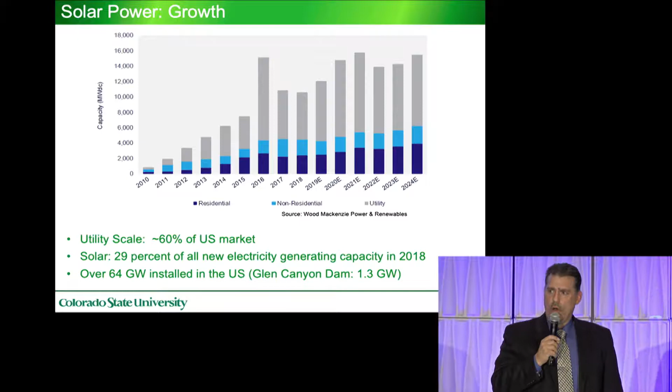60% of the U.S. solar industry is utility scale power. That's not the residential rooftop or commercial, these are the large fields that are deploying to utility assets. Solar was almost 30% of all new electrical capacity added last year.

The reason for this is significantly dropping costs. Since 2009, solar power costs have dropped almost 10x over the course of that time, and that's really fueling this significant growth.

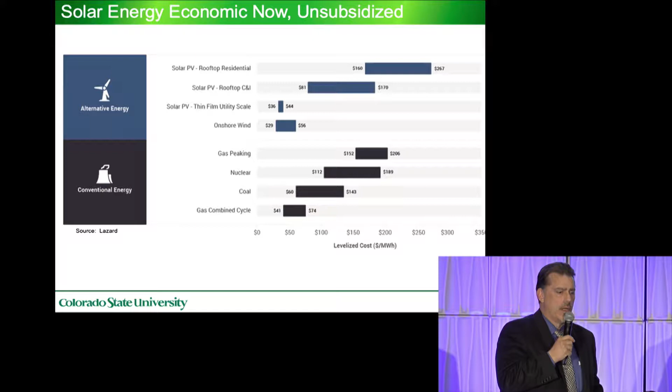So solar is economic right now, unsubsidized, and the Wall Street analyst firm Lazard is technology agnostic. They analyze different technologies, not just solar, and pull out the different subsidies associated with each technology and assign an energy cost, the so-called levelized cost of energy. You can see that thin film utility scale solar is the cheapest compared to any of the conventional resources.

I want to say this another way, something highlighted at this conference: for new generation, if coal, oil, natural gas, or nuclear are used, you're paying more money than solar or wind. And that's not accounting for the benefit associated with greenhouse gas mitigation or pollution prevention. This is just purely dollar per electron.

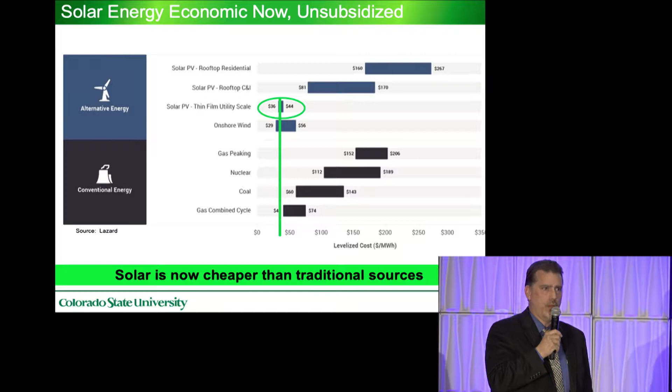So the question is, okay, solar's great, it's economic now, but the sun doesn't always shine. What happens when we have the peak demand, which doesn't fall well when the solar resource is maximum?

Well, we're starting to see with technology innovations in both solar and storage that solar plus storage is now economic. With coal at a median cost of energy of about $101 per megawatt hour, you can see that solar plus storage with different technologies are right in the game there.

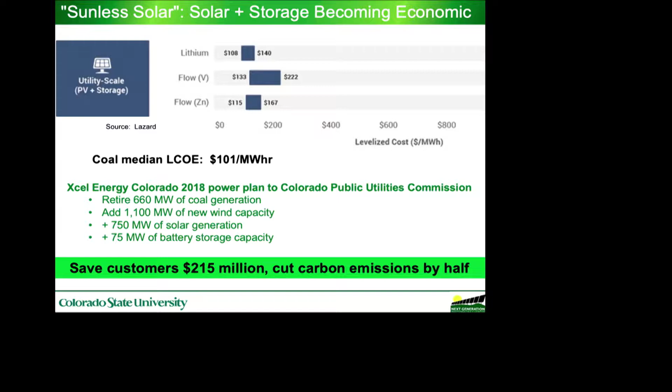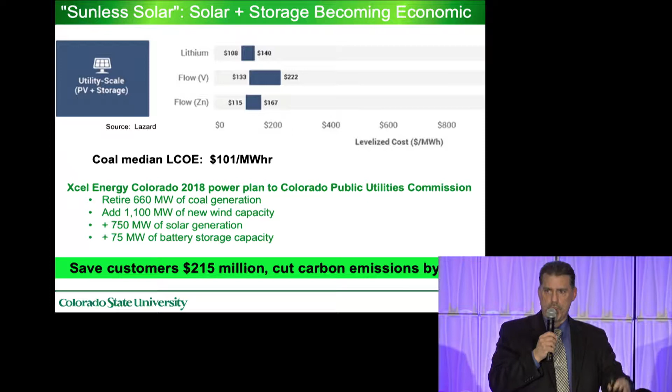An example of this, also brought up by Governor Ritter earlier this session, was that in 2018, Xcel put a power plan to the PUC in which they wanted to retire coal generation and add significant wind, solar, and storage. The outcome of that plan would be to save customers over $215 million and cut carbon emissions in half.

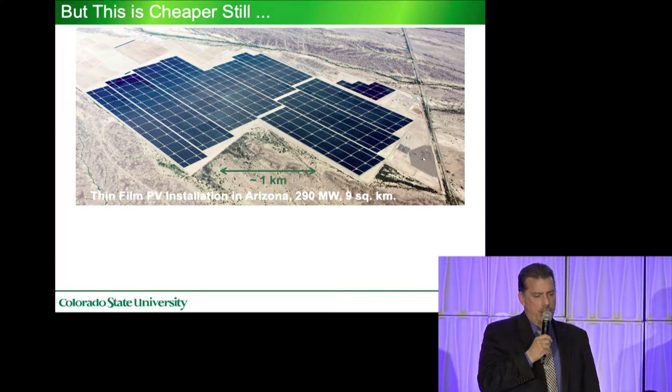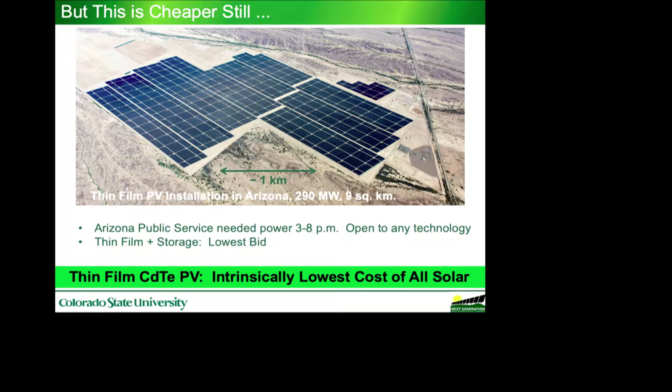So the next generation technology that I work on holds opportunity to be even cheaper still. This is an example of a cadmium telluride thin film plant deployed in Arizona. You get a sense of the scale there—the structures to the right are not cars, those are buildings. This is a giant facility, but this is not something out of the ordinary.

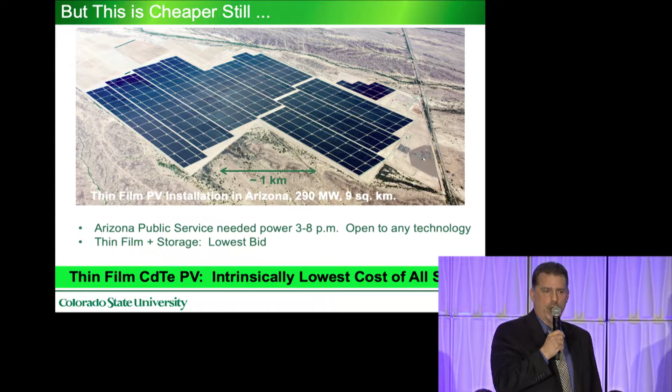As a case of how economic this is, Arizona Public Service asked for power generation between 3 and 8 p.m., open to any technology. The cheapest bid was solar plus storage using thin film cadmium telluride.

The center that I'm with, the Next Generation Photovoltaic Center, is at the forefront of this next generation technology in solar. We started in 1991 researching this technology, chosen based on the fundamentals. It wasn't something that was an outcome of a particular grant activity—it was a key effort that we chose to look forward to.

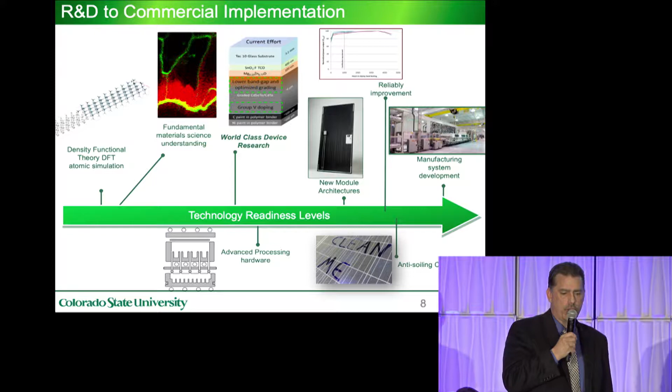Now our center is one of the leading ones in all solar and one of the leading technology development areas for thin film. We have multiple domestic and international university partners, and partner with the Department of Energy, the National Science Foundation, and Sandia. We do research across the technology readiness levels, from the most abstract basic R&D up to technology commercialization.

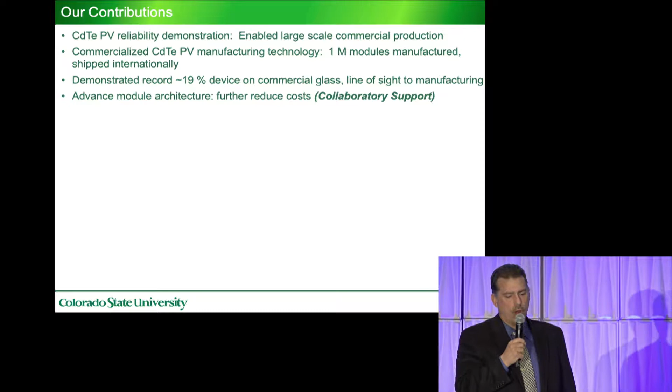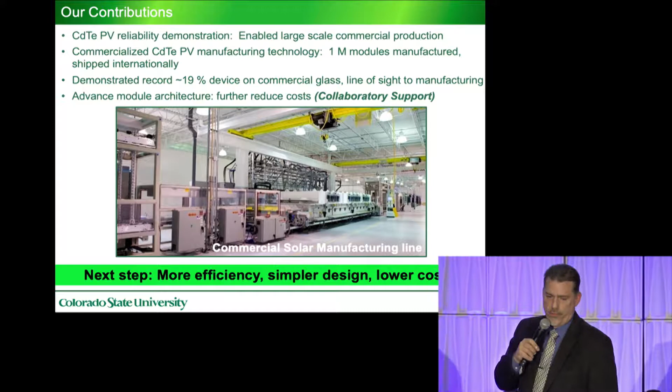Thank you, Brian. Our next step is to improve efficiency, go to a more simple module design, and lower costs. So I'll leave you with our center's mission: the power of the sun to make PV electricity a major source of energy. Thank you.

Our next speaker is Sybil Sharvelle from Colorado State University. She'll be talking about conversion of organic materials into fuels.

Oh, okay. All right, thank you very much. And I'm going to just go ahead and jump right in here.

I'll be talking about how we can treat waste materials, particularly organic waste materials, anaerobically to generate value-added products, including fuels. The most classic example of this kind of technology is anaerobic digestion, which has been around for decades in wastewater treatment facilities. With this kind of technology, we can take food waste, animal manure, human waste—any organic waste material—and use microorganisms to convert that organic material into methane.

In the last breakout session, there was some talk about food waste, and obviously the elephant in the room with food waste is generating less. In some municipalities, up to 40% of their total waste material is made up of food waste. So that's too much—we've got to reduce food waste, but as long as humans are around and eating food, we're going to have some food waste. As long as we're eating meat and animal products, we're going to have cows and pigs and things pooping, and we've also got human waste to deal with.

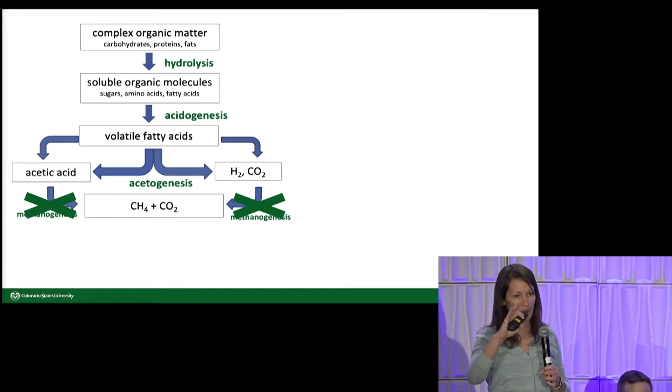One thing we can do is actually cut this process off before methane is generated, forming organic acids instead. We inhibit the methane generation and instead form these potentially higher value organic acids and carboxylic acids that can be used as fuels or to make plastics. Methane is not right now financially highly valuable, so this can be a way to modify this technology to make other more valuable products, and there's a lot of ongoing research there.

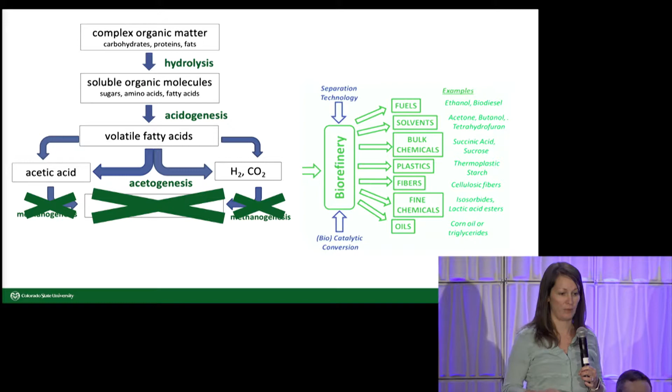A question comes up: is this really decarbonization? We're still using carbon and there's going to be emissions. If we go and take this methane and put it in an engine, we're going to make emissions, and we're maybe not necessarily reducing carbon.

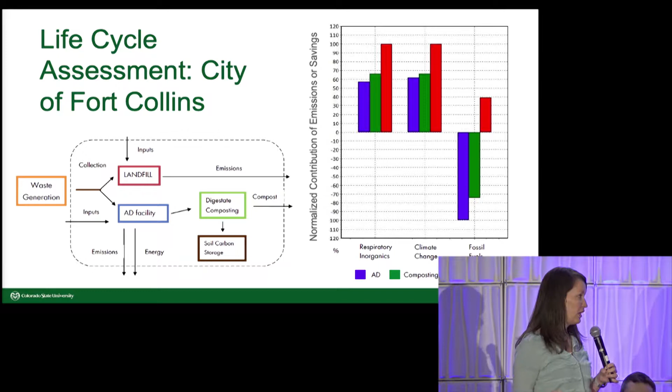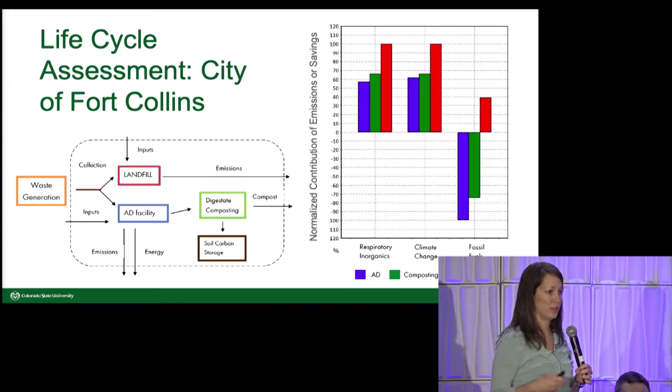In terms of fossil fuels, there's an actual sink of emissions, or use of fossil fuels, that results from anaerobic digestion and composting, even when we consider the emissions. A lot of that is because we're producing a fuel that's replacing fossil fuels. A large component is that the digestate can serve as soil carbon storage, reducing carbon, and it can also replace nitrogen. These food waste and other waste materials have a lot of nitrogen and phosphorus that can replace synthetic fertilizers, so there are fossil fuel benefits from that too. Even when we don't consider those benefits, anaerobic digestion still has a lower carbon footprint overall compared to landfilling.

So there are lots of ways we're working to make new technologies for anaerobic digestion or generation of other valuable carboxylic acids. My lab has generated a technology that's been licensed by Nexus Bioenergy. Traditionally, anaerobic digesters were in wastewater facilities where wastes are very wet, and we're working to address higher solid content manures, like what's generated on feedlots.

So this is the technology we've been working to develop. This is how this can... let me go back real quick, because it's important that we're also working on capturing fertilizer, capturing every potential resource.

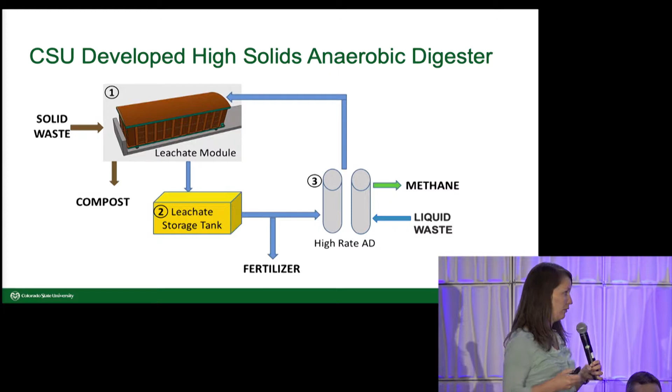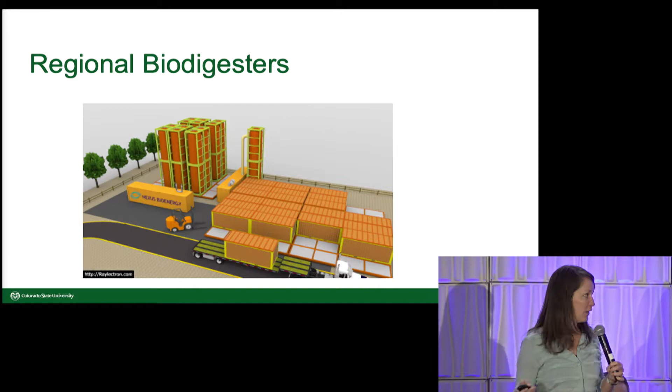I think the most important point moving forward is we've got to work to make these systems more efficient and capture every possible resource out of these waste materials, turning those into value-added products to make this work. That's where a lot of the innovation is happening right now, in how we can generate those useful products. This is a picture of a potential regional biodigester, collecting waste from different sources like municipalities and feedlots, any of the above. And with that, I'll go ahead and conclude.

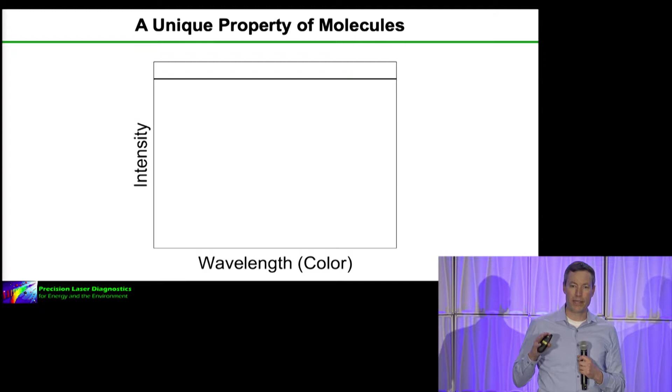Everything I'm going to talk about is based on a simple but unique property of molecules: every molecule absorbs light at very specific wavelengths, different colors. So if I take light of many colors and shine it through a region that might contain water vapor, I'll see at the other end that some of the light is missing at specific wavelengths, and which wavelengths is determined by the structure of that water molecule.

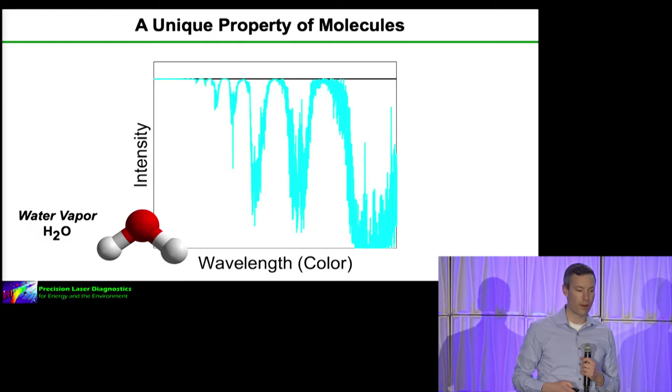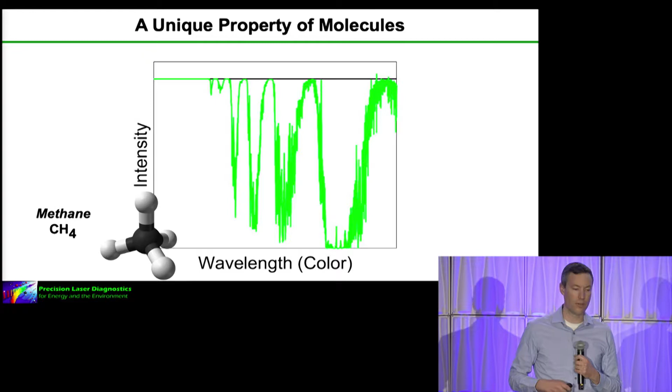If I change the structure to carbon dioxide, I get a different signature. If I do it again to methane, I get yet another signature. So the very same thing that makes most of these gases greenhouse gases that absorb, we can turn that around and turn it into sensors to look for these molecules and quantify them very, very carefully.

The sensor I'm going to talk about is based on a special kind of light source, a laser. We all know lasers, very coherent, I can shine them over long distances, over known beam paths. But there's one problem: most lasers are one pure color of light, so it's not so good if I'm trying to identify those special signatures of the different molecules.

Over about the last 15 years, physicists at the National Institute of Standards and Technology at CU have built a type of laser called a frequency comb that generates hundreds of thousands or even millions of colors of light from the same laser at the same time. This is powerful because we can start to use this to see those signatures of the different gases.

We've heard a lot about natural gas as a transition fuel in terms of reducing our carbon. It's also a really good load balancer because natural gas can enable rapidly tunable electricity generation technologies.

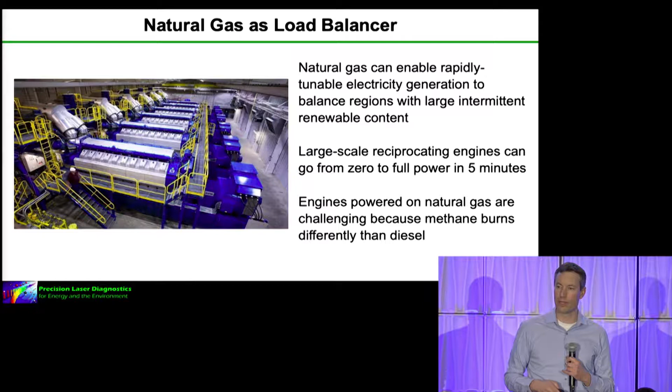Reciprocating engines, which are giant versions of what's in your car, can come to full load in 5 minutes, and so these are being installed to offset things like wind and solar that ramp very quickly. The issue is that we can't just drop natural gas into a diesel engine like we've been running for years. It doesn't burn quite as well, and it burns differently.

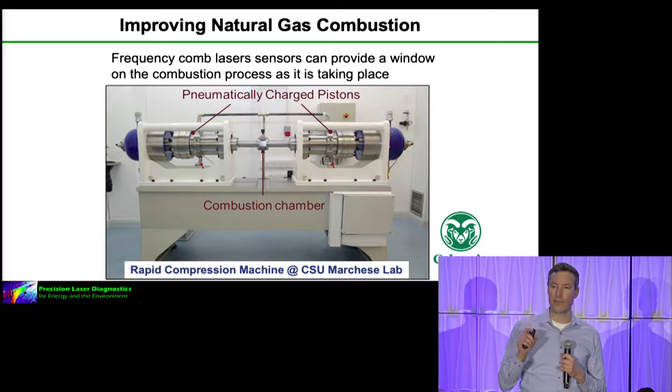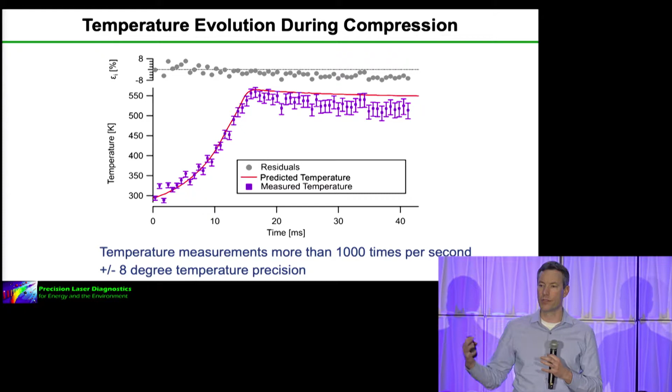So we've paired up with Anthony Marchese at Colorado State University, and we brought these frequency comb lasers up to his lab and tried to gain a window into the combustion process happening in natural gas engines as it's happening. These are some measurements of temperature during compression in a system much like a large-scale natural gas combustor, and we can measure temperature, methane, and the evolution of these species more than 1,000 times per second.

So we can take that same technology and move way up to the upstream end of things and look at the production of natural gas. We know that burning natural gas is nice as a transition fuel, but because it's a powerful greenhouse gas absorber, if we leak just a few percent of our methane along the way, it more or less offsets the benefits of burning it as a fuel.

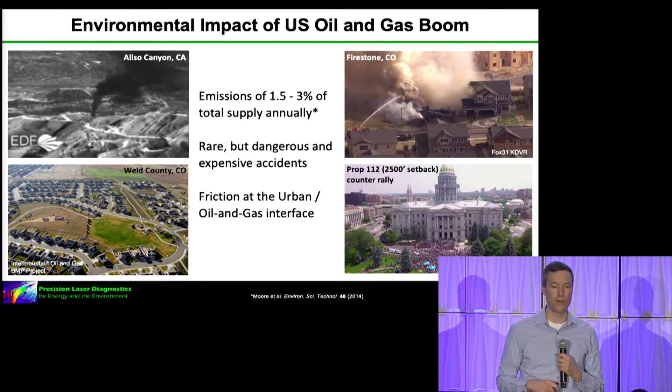Also, if we have rare but dangerous accidents, that has caused, as many Coloradans have seen, a lot of friction at that urban oil and gas interface. So the question we were asking ourselves is, could we take this same technology and send laser beams out over mile-long path lengths to look for leaks across vast swaths of the very dense oil and gas infrastructure that exists, for example, in eastern Colorado? And if we do that, can we bring the monitoring cost per site to really, really low levels?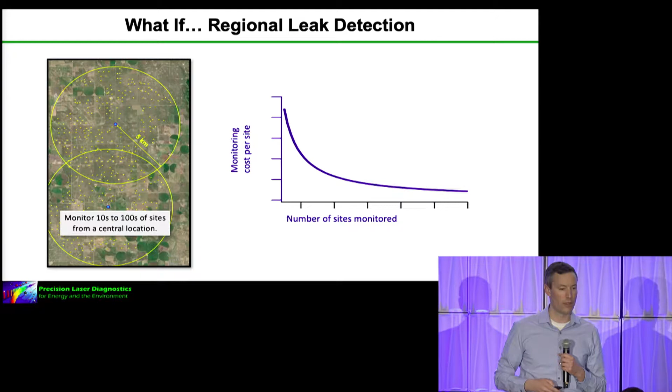And so we've done this. With funding from Brian and the ARPA-E program, we've put these systems in the back of trailers in eastern Colorado. We've sent the laser beams out over oil and gas fields. We've gone to the CSU METEC test site and shown that we can detect, from a kilometer away, methane leaks as small as 1/8 of your breathing rate right now. We can attribute it to the right pad, and we can size it to within 20%.

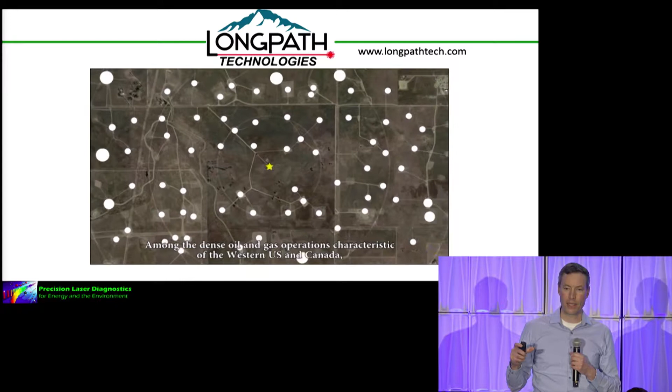The team got very excited about this, and we've spun out a company now called Longpath Technologies that's working with 4 industrial partners to roll this technology out into the field and figure out how to integrate it with oil and gas business practices.

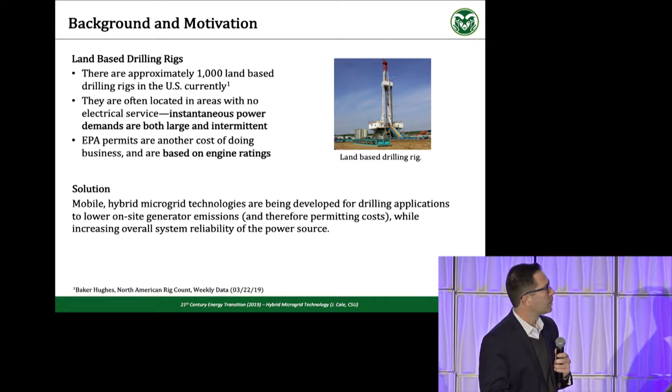So the technical approach here is the typical generator system in a hybrid combination with energy storage and power electronics.

The idea is that as the load increases, you get these large swells, and you can provide power almost instantaneously using the batteries. That idea itself is not new, but the technical advances are around the instantaneous tuning and control based on changes in load dynamics.

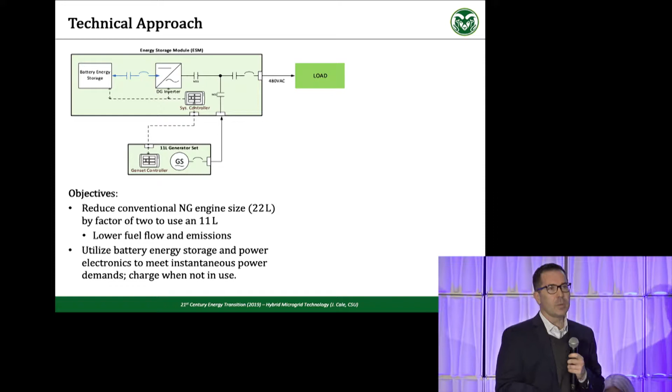The other thing with this technology is that if the generator system goes out, let's say there's a discontinuity in fuel flow from the wellhead, then this acts essentially as a UPS, so you can ride through those cases with the battery storage system.

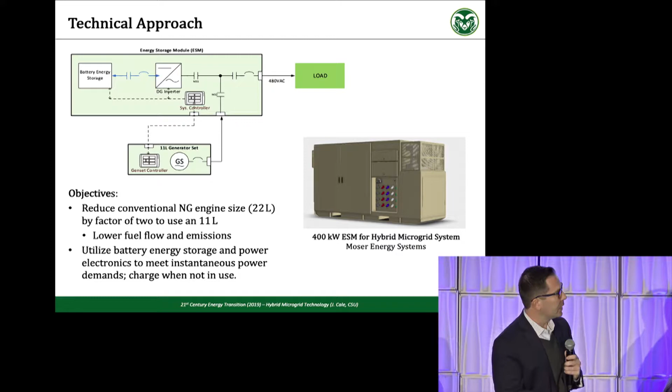The example I'll show, a real system, is the reduction of a 22-liter natural gas generator down to an 11-liter generator. This is our prototype system, 400 kW, being developed by Moser Energy Systems. You may have heard of them if you're in the oil and gas industry.

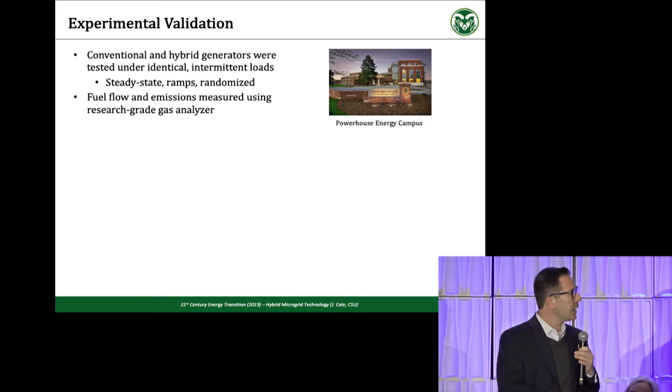Right now, as we speak, we're doing experimental validation at the CSU Powerhouse Lab, about an hour north of us if you're interested in visiting. We have infrastructure there to do testing up to 400 kW with a programmable load bank, so we can do side-by-side measurements between the conventional and hybrid unit, with steady state and randomized loads, and research-grade gas analyzers for comparisons.

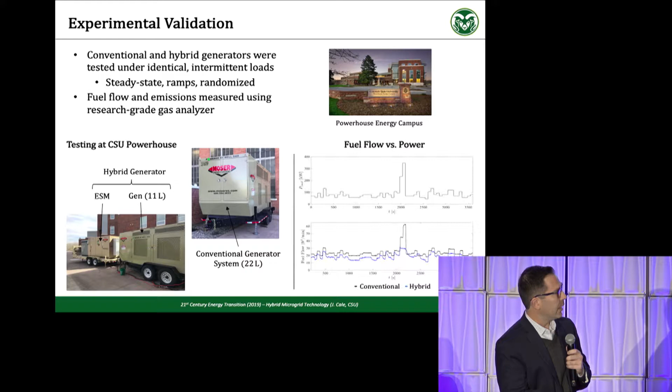The plot on top shows randomized load profiles based statistically on measurements we've obtained. You can see the spike in the middle where it goes up to about 350 kW — energy storage seamlessly accounts for that.

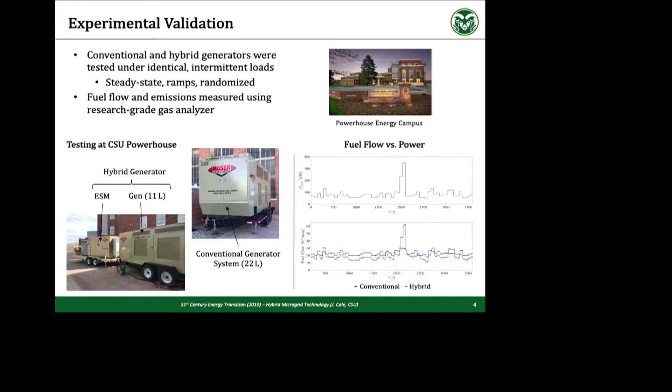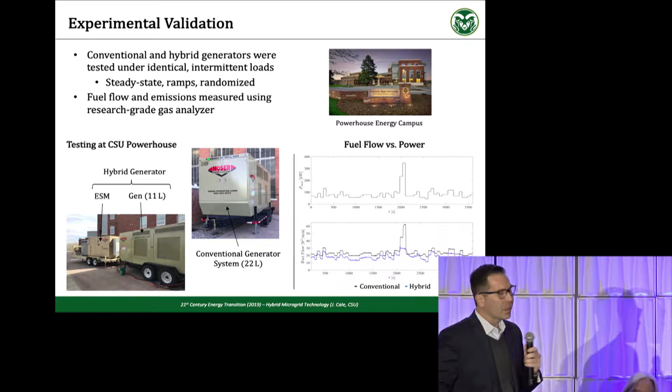The black plot on the bottom shows fuel flow from the conventional system, and the blue line shows the hybrid system. There's a clear reduction in fuel flow, and we think there'll be a reduction in emissions as well.

I don't have a lot of time to talk about other applications, but think about drilling operations, which have high intermittent power needs. We're also trying to electrify shipping ports in the US and elsewhere — a very similar application. In disaster response, if you're in a remote area trying to power vehicles like forklifts for cleanup and other responses, these systems can be used. So ironically, this is being developed for an oil and gas application but has much broader applications as well.

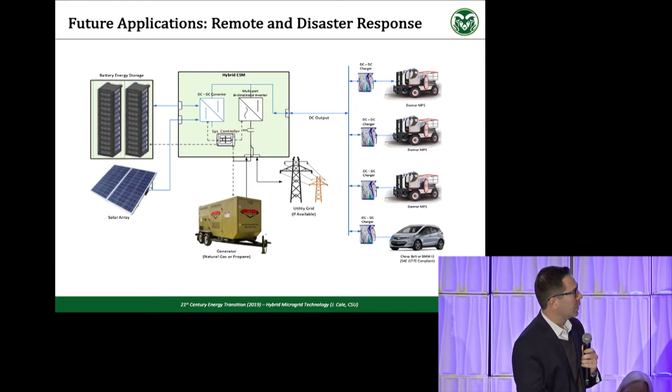In summary, mobile hybrid technologies can be used in this case but also in other applications, and business incentives are actually driving the technical solutions here — lower permitting costs, lower emissions. I mentioned two applications, but also in emerging economies, a lot of times power is 100% diesel fuel, so it's relatively difficult to transition to renewables. We see this as a bridging technology to incrementally get to larger amounts of renewables.

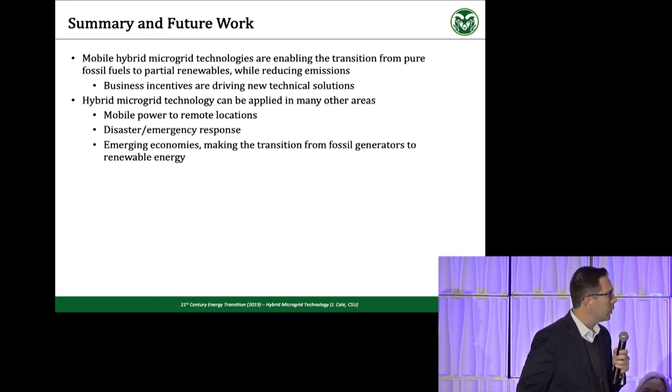That's all I had today. If you'd like to talk about this project or other research at Powerhouse, here's my email address, and I have the contact for the VP of Innovation and BD at Moser as well. Thank you.

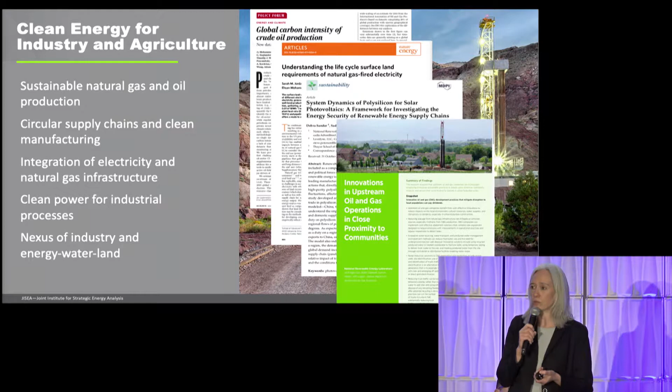One of the things we've really focused on is how do you put together consortiums to study specific problems. This is an existing project we have.

One of the things we do is put together consortiums of partners, and the ones listed here are not groups that normally work together and fund research together. This consortium we put together to look at how we can co-simulate the power and natural gas networks.

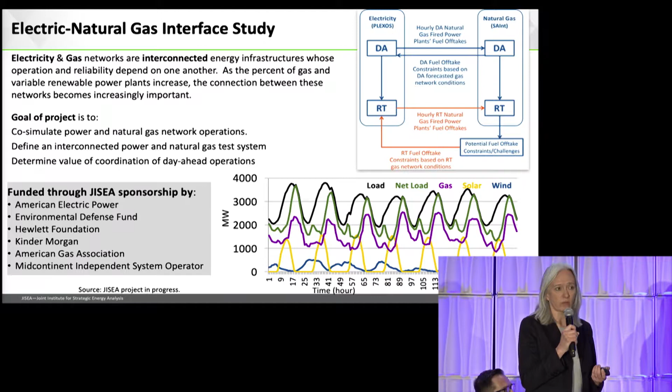How can we define how those systems work together and figure out how to do day-ahead operations, especially when we're expecting extreme weather conditions. This project will be putting out some of its final reports in the next few months. That's built on how we can think more closely about how industry works.

How do we bring some of these clean power technologies to industrial processes, such as the production of oil and gas? Currently 10 to 25% of oil and gas is self-consumed in the production, both the extraction, the piping, and the refining process.

This is a very precious material. Some of the presenters this morning were talking about how we're going to need oil and gas for things like aviation fuels, which need a highly dense fuel that's going to be hard to produce with solar and wind.

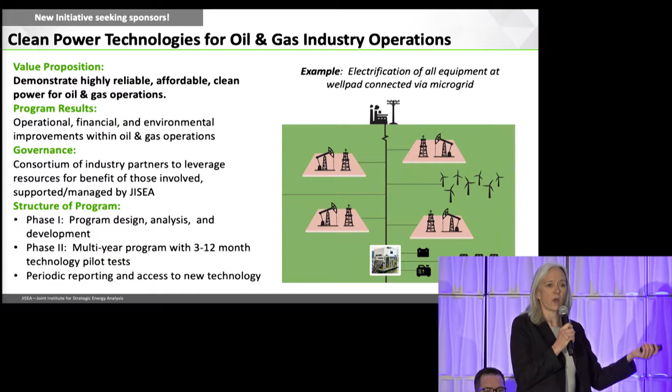So how do we conserve these precious resources and not self-consume them or burn them in a way that's inefficient? This is a project where we're starting to put a consortium together now about how we can bring wind and solar and other things into the oil and gas process so that the majority of that product gets used for higher value uses.

A second project I want to mention is we've been looking at the land use and the optimal land use of renewables and other types of energy systems, and how you co-locate agriculture with wind and photovoltaic development.

We've all seen that under most wind turbines you get a lot of agricultural development. But now we're actually doing studies of what are the best crops to grow under solar panels, how you put them at the right height and angle so you still get the proper amount of light and water, and how you can optimize these.

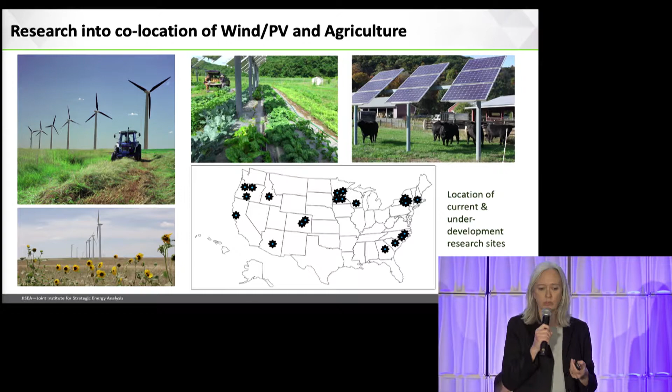We've got a number of sites actually looking at the best crops, the best locations, the best approaches to do this. This led us into thinking about these rural areas.

There's a lot of focus on urban areas and electricity generation, but a lot of our energy comes from rural areas, either the oil and gas extraction or wind and solar developments.

We're starting to put together a new project that's going to look at economics of rural areas and how we can transform those, thinking about the energy, water, food nexus into best use of improving the lives in these rural communities, because that is where a lot of our energy extraction and energy is coming from.

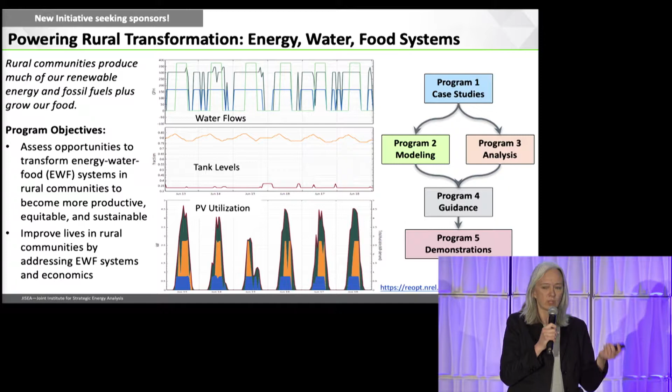Thinking about these holistically, energy, water, food together, we're seeking to put together a consortium to begin to explore these, both internationally, where there's obviously a lot of energy, water, food issues, as well as our domestic rural locations as well.

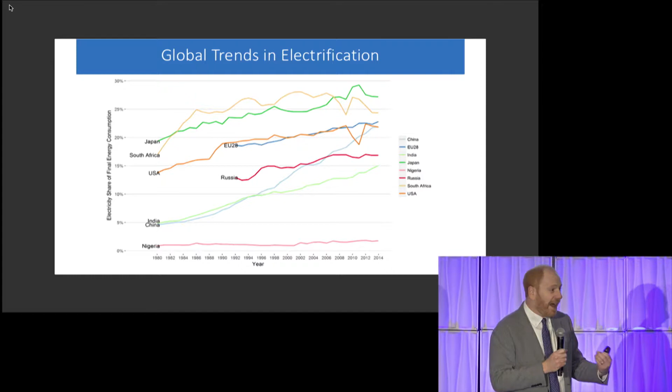This slide shows the percentage of final energy made up by electricity. Final energy is the stuff that's consumed at the point of end use—the fuel going into your car, the electricity powering these lights and the computers right now. What we're seeing is that across the board for this sample of countries and regions, the amount of stuff being powered by electricity is increasing. So this is not just an increase in electricity consumption, but the amount of end-use services being consumed are more and more being powered by electricity.

So why is this? I'd argue it's because electricity is a pretty fantastic fuel. Once you've invested in and built a transmission system, you can move electric energy from point A to point B almost instantaneously, about 3/4 the speed of light. It's highly flexible and controllable. And as a result, you can use it to power a whole range of end-use services, from HVAC applications—heating and cooling—to industrial scale processes, in this case an electric arc furnace, obviously transportation services, and of course all your home appliances.

Historically, electricity has been something very challenging to store. As a result, it's required large capital investments in things like pumped hydro storage facilities, shown in the bottom right there—things that require a lot of money and have a lot of environmental impact. But as we've seen precipitous drops in the cost of battery storage, this is becoming much more feasible today.

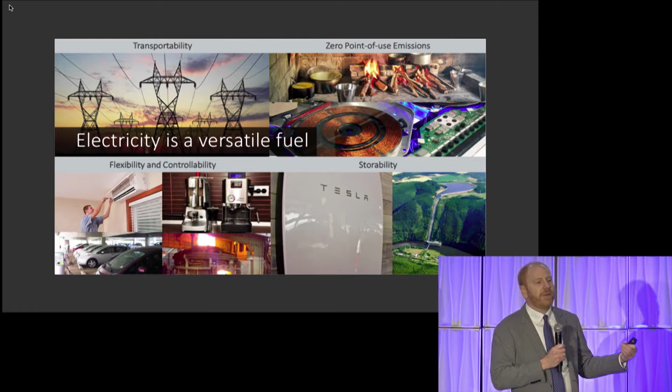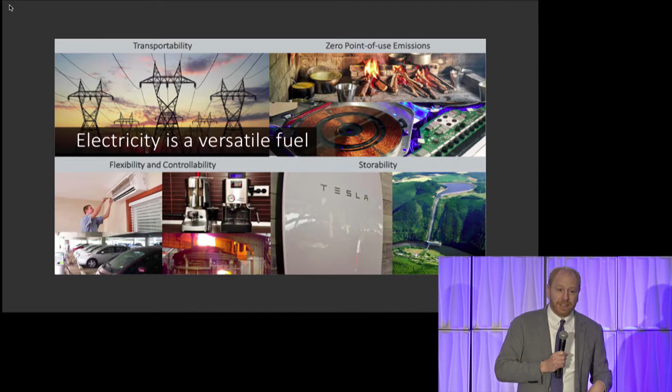And perhaps of most relevance to this session, electricity has zero point-of-use emissions. When you consume electricity, there's nothing coming out of your espresso machine on your counter, nothing that you're breathing in—it's just electricity. That's not to say electricity doesn't have large amounts of emissions associated with it. Here in the US, it accounts for about 1/3 of total emissions economy-wide. But those are large point source emissions, and there are ways we can mitigate those if desired, through either substitution to lower-emitting or zero-emitting generation facilities, or through direct capture, which you'll hear a little about later today in terms of capture and storage of those emissions.

So as a result of the potential emissions benefits, as well as the potential benefits associated with the quality of service available through electrified technologies—this might be your zippy Tesla that you're driving around, it might be a single air source heat pump, electric-fueled, that can provide all your heating and cooling needs as well as water heating from a single unit in your house, or it might be your new induction range, which can boil water extremely quickly or be highly controllable in terms of the amount of heat you're committing to your pots and pans.

We perhaps are on a precipice of rapid electrification of many end-use services. So one thing we've been asking is: what are the potential impacts of a future that's highly electrified? How is the power sector going to respond to that? And what are the total economy-wide impacts? I wanted to share just a few quick results from this—it's a multi-year, multi-institution study. It's really a scenario-based approach to the analysis, where we looked at what are the key end uses that could be electrified going forward, what are the different technologies that could provide those end uses, and how are those technologies going to evolve through time.

And given that evolution, how might the adoption behavior change? So is it not just a certain subset that's going to be adopting battery electric vehicles, but are they going to be pervasive across the economy? Same goes for the building sector, for the industrial sector.

So we developed three different scenarios of evolution through time: a business as usual scenario, the reference case, which is basically things stay relatively similar to how they are today. A medium case, which is widespread electrification of all the low-hanging fruit—electrification of light-duty vehicles, electrification of heating in buildings, both residential and commercial, and a little bit of industrial electrification, but not widespread.

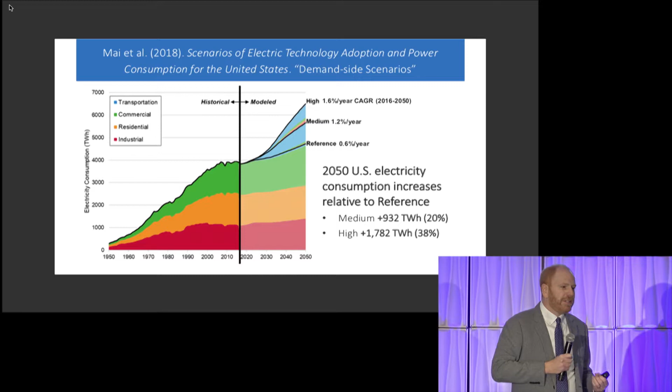The other key thing is that most of that increase is coming from transportation. This is something we found in our study that's been confirmed across a lot of different studies from different institutions. But currently, the transportation sector is less than 1% electrified, and if we start to plug away at that end use, we could generate a lot more demand for electricity, substituting away from conventional fossils.

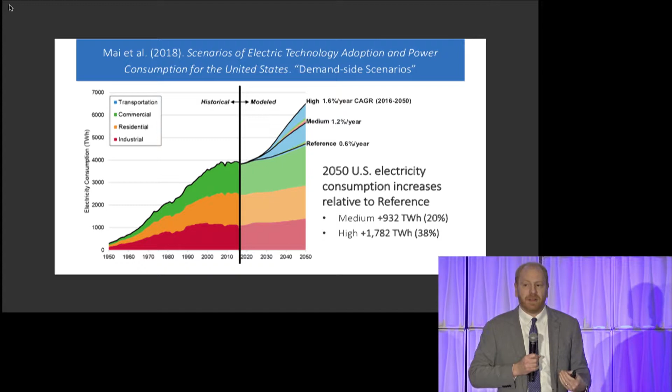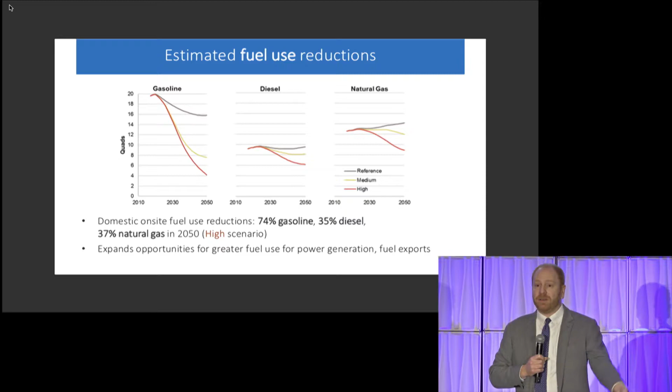We also see pretty substantial decreases in the amount of natural gas consumed for heating purposes and for industrial purposes. So overall, at that point of end use, we're seeing huge opportunity to reduce consumption of these fossil fuels, which can then be used for other purposes—be it increased exports, utilization, or power generation.

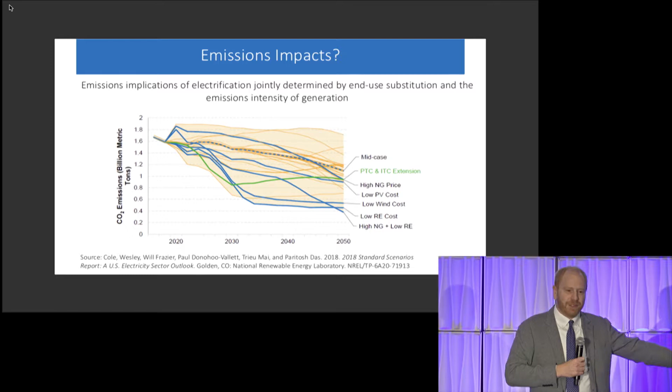Ultimately, what are the emissions impacts of these scenarios? We're still working on this—it's jointly determined by both what's happening at the end use side and what's happening on the power sector. Our next phase of the study is really going to be looking at power sector evolution, and we'll be releasing that shortly. You can go to this website for more information, or come find me afterwards.